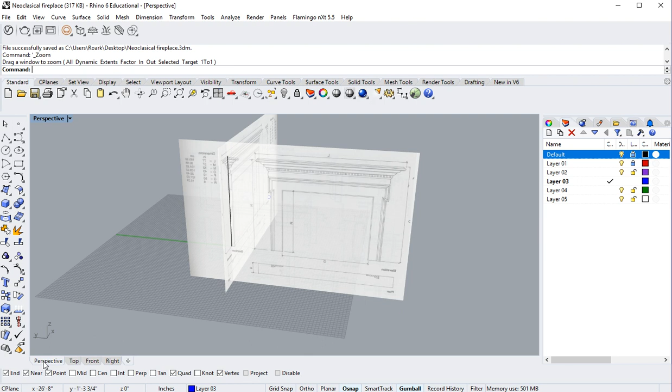Okay, I'm going to jump into my perspective. I've already brought in some reference images and I've already changed the transparency. You should definitely know how to do that by now because we've done it several times in class.

Okay, so the concept here is what I'm going to do is trace this one here, and I'm going to trace this here, and I'm going to run a sweep one rail to get some detailing, or to get a cornice.

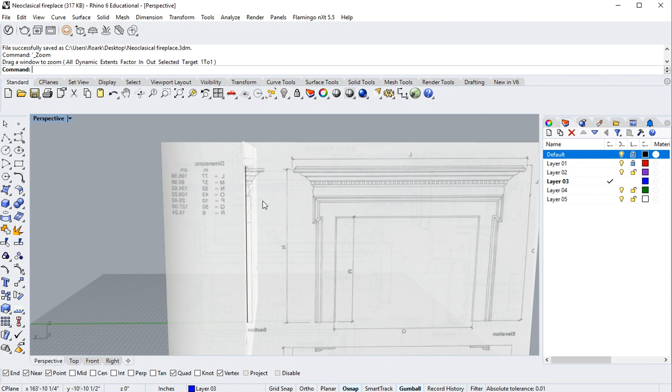Okay, so I think the first thing I'm going to do is I've got two different objects here, and they're on different layers. I'm going to go ahead and hide this back one, and now I'm just going to work in what I believe is the right side. I'm just going to trace this top area right here.

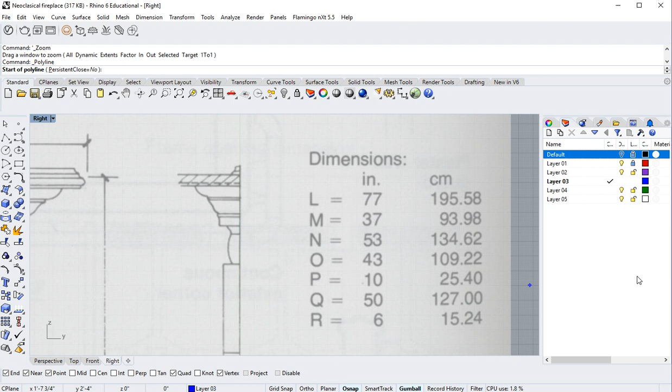So I'm going to grab a combination of a polyline and a control point curve, and I'm going to start. I'm actually going to go down to 0, and I'm going to go up here just so I can have somewhere to snap to. I'm going to hit enter, and now I'm going to do a space bar, and fairly quickly.

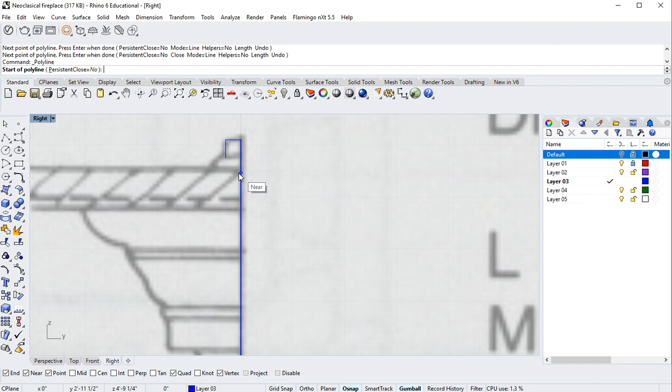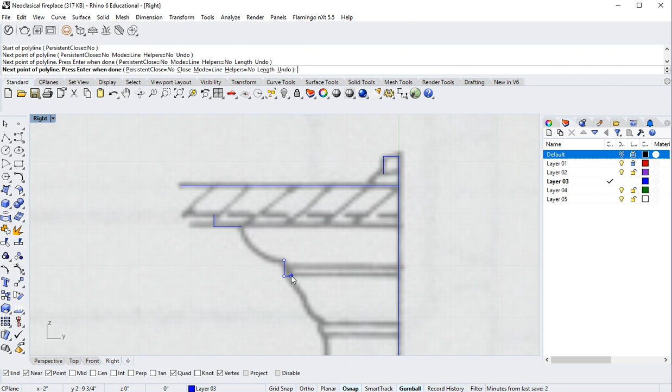Just add a few objects in here. Space bar again, and I don't know where this stops or starts, so I'm just going to stop right there, and I'm just going to say that this goes down like that. All I'm doing right now is just really quickly grabbing things that I believe are straight lines. That's basically going to simplify everything that it is that I'm doing.

Alright, I'm not going to get this bottom part here. I am going to, however, get one more straight line so I know where to stop and start. So I'm going to click here, hold my shift, and then stop.

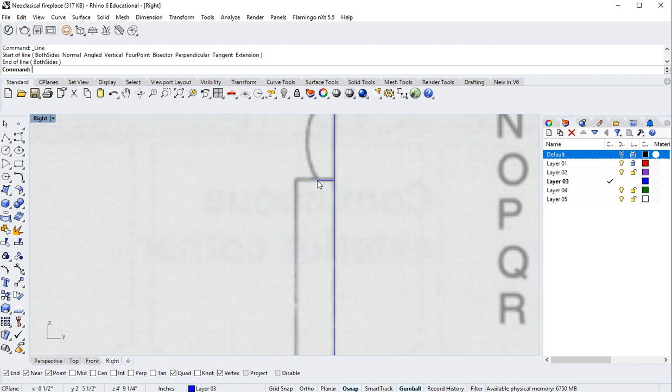Okay, now what I'm going to start to do is use my control point curve, and I can be fairly nonchalant here while I'm doing this. And I'm also stopping in the middle of some of these things.

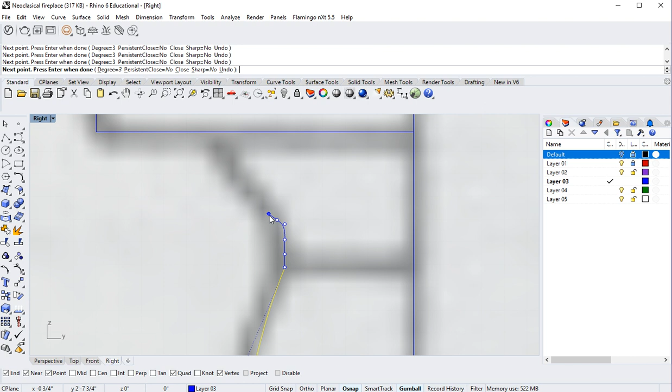Now here I want this part to be moderately straight, so when I say stopping, I mean I'm doing one control point curve, and then I'm stopping and starting another one. I want this to be fairly straight, so I'm holding down my shift, 1, 2, 3, and then I'm going to let go of shift and put a couple control points pretty close together, and give a nice curve up here, and then I'm going to stop, hit enter, and repeat the same thing here. Hold down shift.

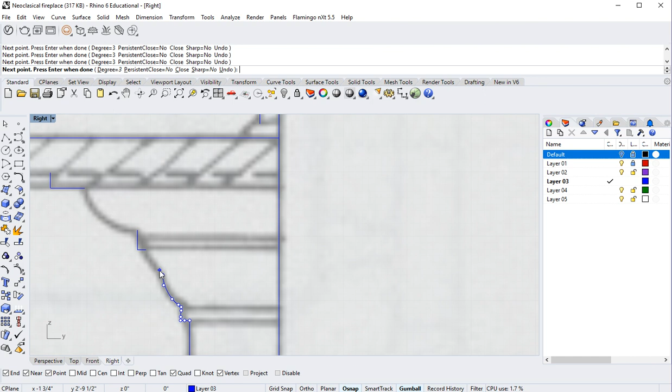And now I'm going to go up, hold down shift, and now kind of a gentle curve, hit enter, same thing here, maybe see if I can do it in 4 points. Alright, and I'm going to give this kind of a gentle curve as well. I'm going to hold down shift and stop right there and hit enter.

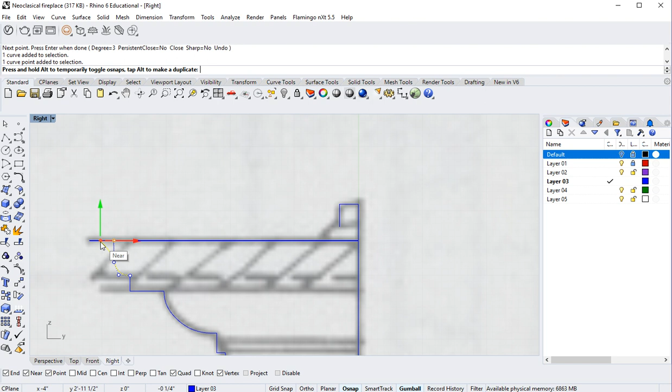In fact, I think that this part of the fireplace might stretch out a little bit more, just like that. There we go. And I'm going to fillet this whole thing in just a moment.